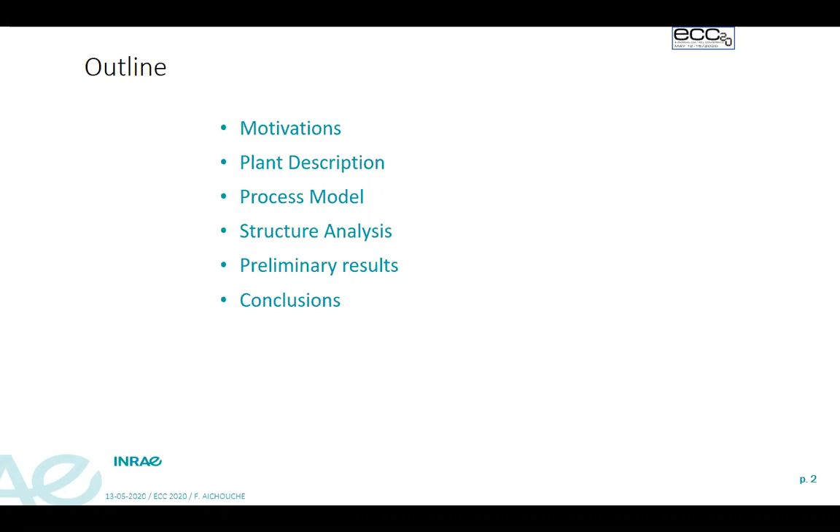So in the outline of my talk, I'm going to start by talking about the motivation that led us to state the flexibility of wastewater treatment systems and define our goals. Then I'm going to move on to the plant description, where we will describe a flexible platform and illustrate the various compartments used. After that, we define the process model used and how we analyzed the structure by manipulating the different sub-configurations, and we will finish with the results and their discussion, and finally the conclusion.

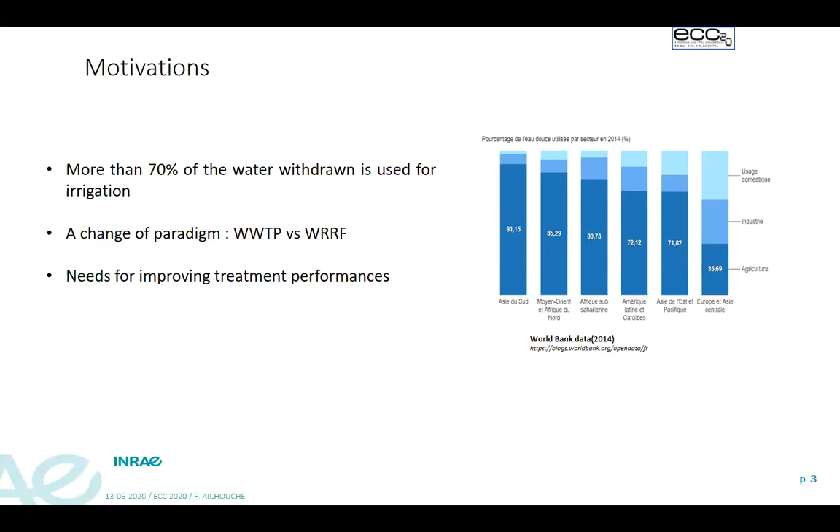We start with the motivation. In most regions of the world, more than 70% of the water withdrawn is used for irrigation. And according to the change of paradigm from wastewater treatment plants to water resource recovery facilities, traditional wastewater treatment plants are increasingly regarded as water resource recovery facilities, reflecting the value of water, nutrients, and other resources, in addition to ensuring the required effluent quality. But resource recovery units will need improved performance to be operated in a relatively stable condition and not with the same dynamics as in wastewater treatment plants.

The objective is to do things differently. Instead of just doing the traditional wastewater treatment and eliminating pollution to respect imposed standards, why not think of a more flexible system that allows traditional treatment during one period and resource recovery in another period? The idea is to close the loop between the flexible wastewater treatment plant and the plant needs, which are provided by the sensor or observer of the plant.

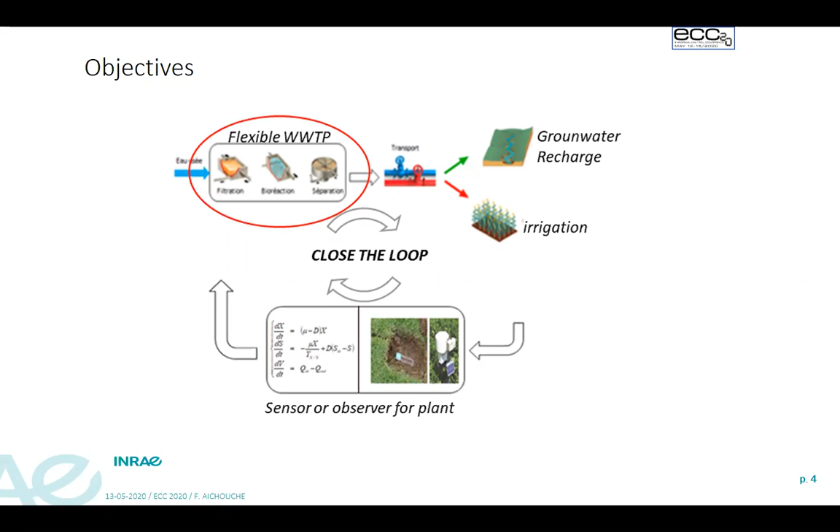The approach is to reuse treated wastewater for irrigation during periods of water stress. In other words, conserve some nutrients in treated wastewater for plant needs, or do full treatment outside the irrigation period. This operation requires a transition between two operation modes, reuse mode and full mode.

Now we present the platform proposed. So the flexible platform configuration consists of one anoxic tank, number 4 in the figure, followed by aerobic tank number 5 in the figure, and an aerobic tank with membrane, number 6 in the figure. The membrane is supposed to be ideal, with perfect separation of soluble and particulate matter. In other words, the fouling phenomena is not taken into account.

The platform can be operated by step feed as one stage, only tank number 6, or two stages with tanks 5 and 6, or three stages with tanks 4, 5, and 6, by adjusting the influent feeding location, Q in, and the recirculation rate. The denitrification takes place in anoxic tank number 4, while the nitrification and carbon oxidation are accomplished in both aerobic tanks number 5 and 6, and also three valves, A, B, and C, are assumed to have two positions. One external recirculation Qext depends on the position of valve C.

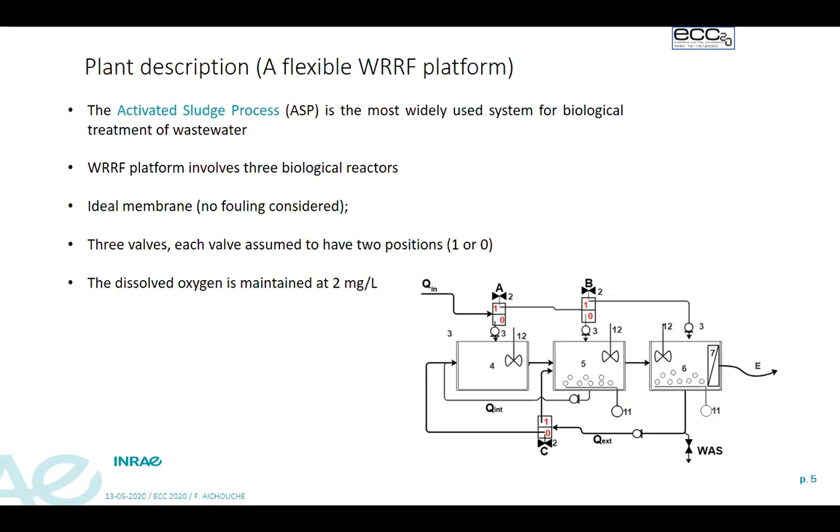We can redirect it to aerobic tank number 5 when the C position equals 1, or to anoxic tank number 4 when the valve C position equals 0. And another internal recirculation from aerobic tank number 5 to anoxic tank number 4. Also, the dissolved oxygen in both aerobic tanks is maintained at 2 milligrams per liter.

Now we present the process model. So the biological reactions inside each reactor in the platform are modeled using the ASM1-2ND model. It is a modified model of ASM1. The main modification consists in the addition of two-step processes for nitrification and denitrification. While the ASM1 model, figure on the left, considers only complete nitrification of ammonia NH4 to nitrate NO3 by autotrophic bacteria XBA, followed by complete denitrification of nitrates to nitrogen gas N2 by heterotrophic bacteria XBH.

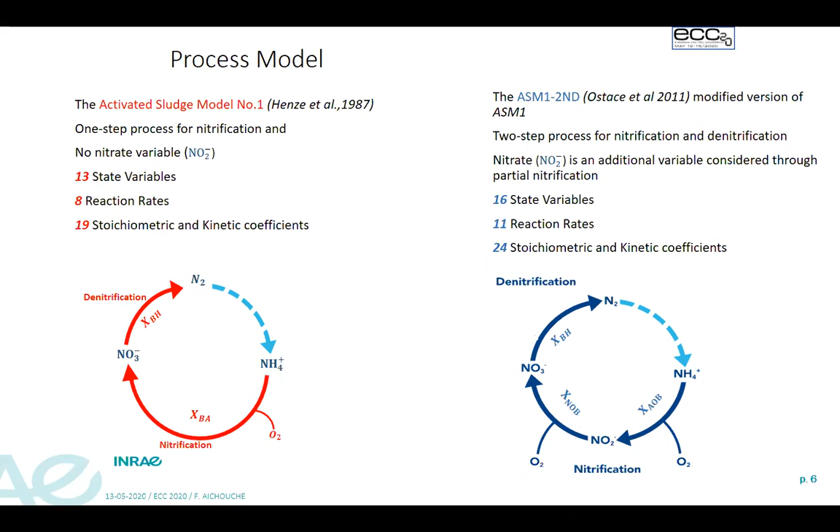ASM1-2ND uses two steps for nitrification. The first one describes the ammonium NH4 oxidation to nitrite NO2 by ammonium oxidizing bacteria XAOB, while the second step is the nitrite NO2 oxidation to nitrate NO3 by nitrite oxidizing bacteria XNOB. The denitrification is performed following a parallel two-step in which nitrate or nitrite are transformed into nitrogen gas N2 by heterotrophic bacteria XBH. This model was chosen because we can quantify all forms of nitrogen.

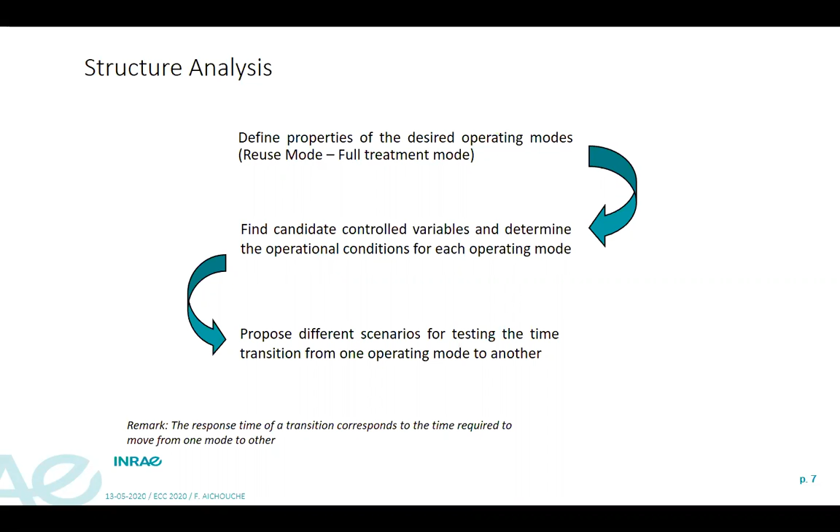So for structure analysis, in order to analyze the WRRF platform, we start by defining the properties of each desired operating mode, reuse and full mode, and the next step consists in determining the operating conditions and finding candidate controlled variables. After that, we propose various scenarios for testing and determining the best transition strategy in terms of response time. To remember, what we mean by response time of transition is the time required to move from one mode to another. So now we define the operating mode properties.

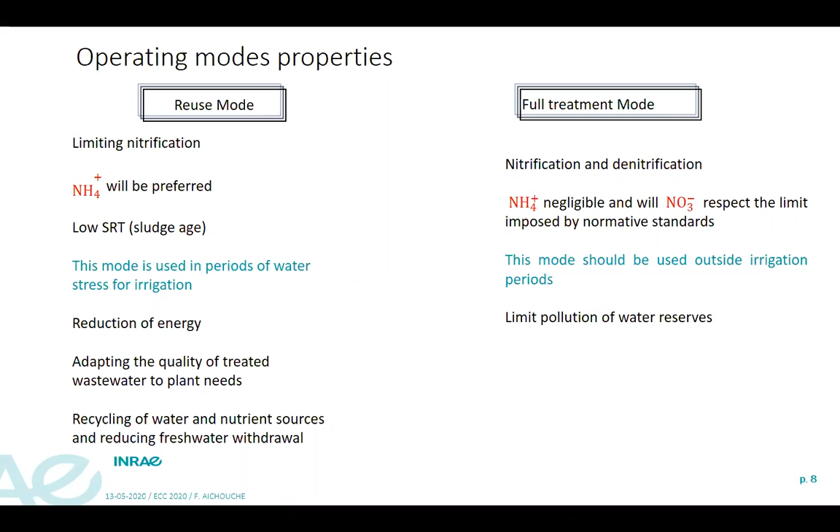In the reuse mode, it's necessary to find a condition in which the biological treatment will make it possible to preserve the nitrogen, and therefore NH4. So the nitrification will have to be limiting. It means that the sludge age SRT must not be too high. This mode will be used in periods of stress for recycling of water and nutrients such as NH4 and reducing freshwater withdrawal. The second, full mode, must make nitrification and denitrification possible. So the sludge age SRT must be sufficient. This mode should be used outside the irrigation period to limit pollution of water reserves.

Now we define the operational conditions. The sludge retention time is one important parameter for design and control in activated sludge processes.

It represents the average length of time that bacteria stay in a reactor before being wasted. The selected SRT directly affects the processes in an activated sludge system. This parameter contains a critical value called SRTM, or the minimum SRT, in literature defined as the inverse of growth rate minus mortality of nitrifying biomass. So by choosing an SRT higher than this value, the system can operate without loss of nitrifying biomass.

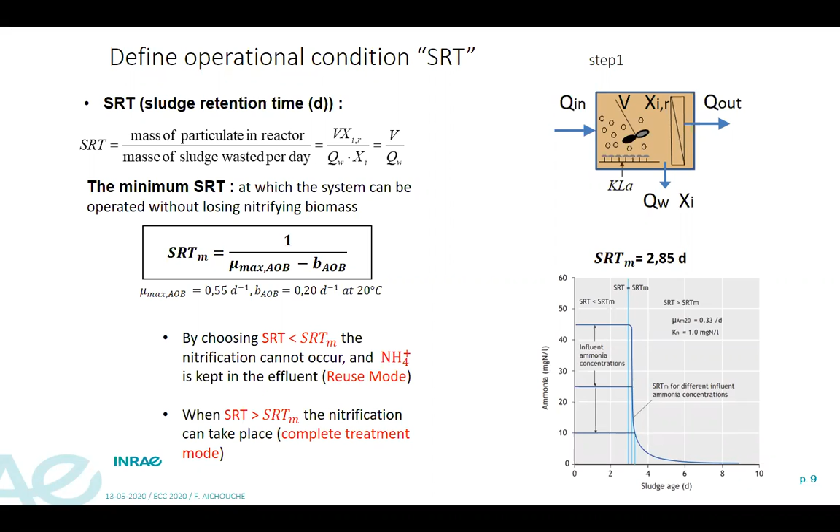As you can see in the figure on the bottom, for limiting nitrification, it is necessary to choose an SRT lower than SRTM. If you choose an SRT higher than SRTM, the nitrification can take place.

Now, valve position analysis. In order to analyze the platform and determine the best transition strategy in terms of quality and response time, it's necessary to identify the scenario for each mode of operation. Each scenario represents a combination of valve positions. We study switches of environmental condition, position of valves, and value of control signal. Different switches are simulated from one scenario to another, and corresponding response times are observed. It means the time required for the system to switch from one steady state to another one.

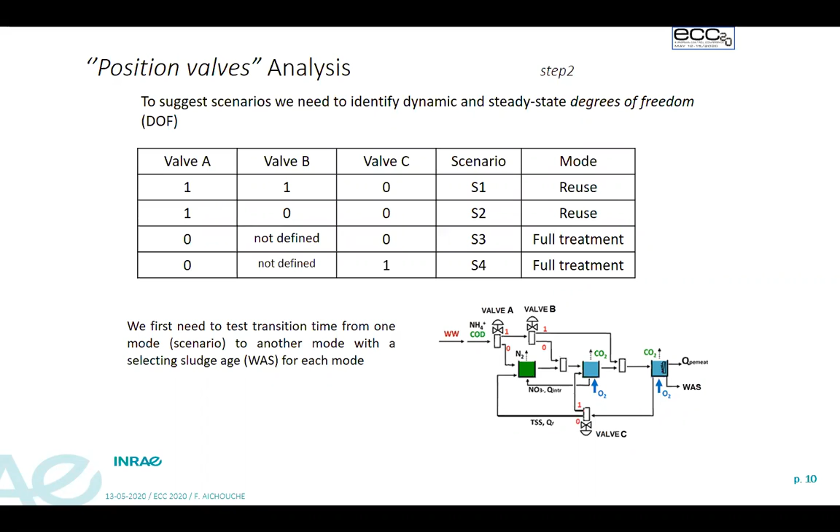In each mode or scenario, we selected the value of sludge age, or WAS, and the value of recirculation rate. It should be noted that the valves in different configurations are supposed to be all or nothing. Each valve represents a direction of corresponding flux. The first two scenarios are used for reuse mode, while the second two scenarios represent the full treatment mode.

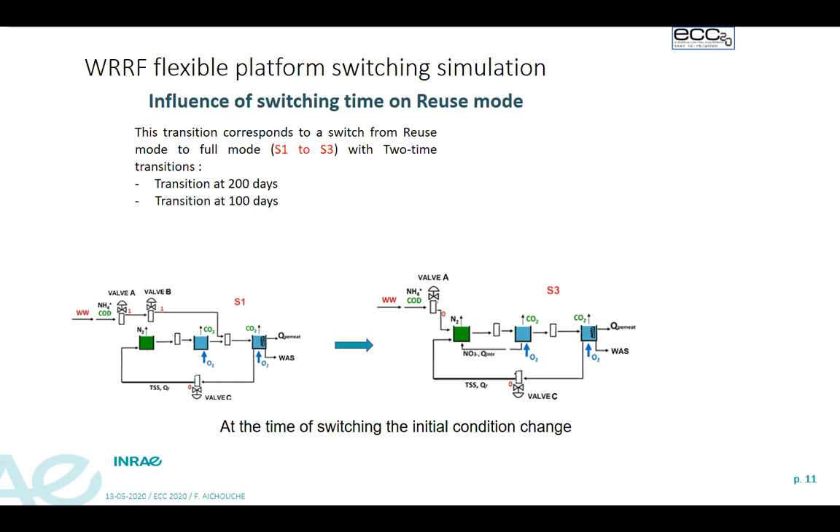Now, to study the influence of the switch time on the response time, we tested the transition from scenario S1 reuse, as we can see in the figure at the left, to the configuration corresponding to scenario S3, or full mode, figure on the right. Two transition moments, the first at 200 days and the second at 100 days. It's important to remember we have different initial conditions at the time of switch.

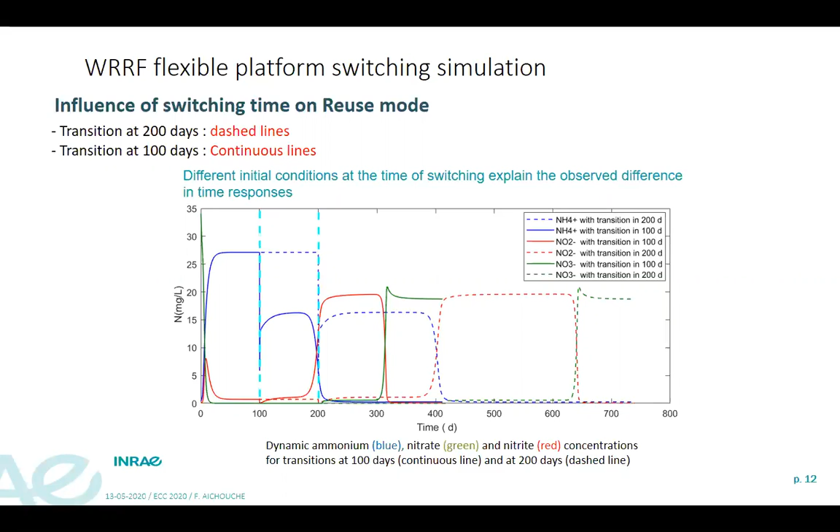In other words, the more the bacteria are subjected to a higher waste sludge flow for a prolonged time, the more their concentration is diminished. Now we want to see the influence of returned sludge direction.

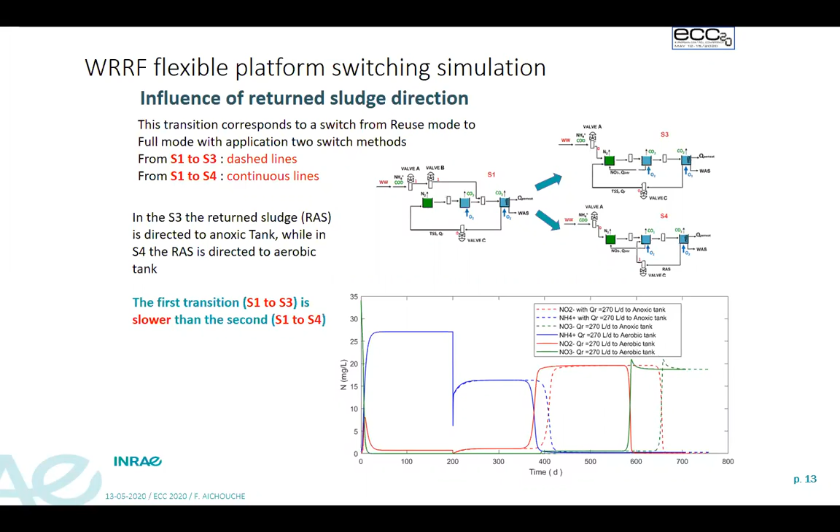The figure on the bottom shows the comparison between two transition cases. The first one is the switch from scenario S1 to S3, while the second is the transition from scenario S1 to S4. The main difference is in the direction of external recirculation. The first, dashed line, is slower than the second one. So when the returned sludge was directed to the aerobic tank at the instant of transition, it promoted the growth of nitrifying bacteria since it reduced the lag phase.

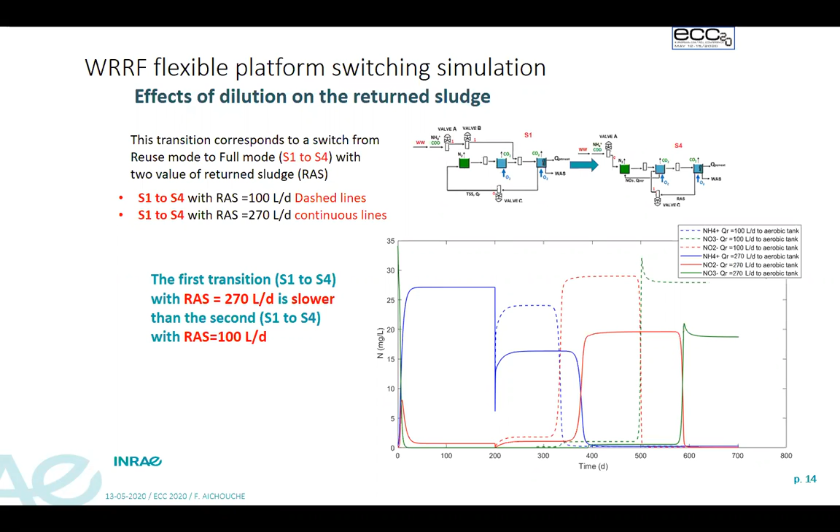So all the transitions that have been tested before have a very important response time, even if one is better than another. So the next strategy focuses on the use of bioaugmentation, or addition of nitrifying bacteria, to minimize the time to switch from S1 to S4. From the simulation viewpoint, it's equivalent to changing the initial condition of nitrifying bacteria, AOB and NOB, in the reactor at the moment of transition.

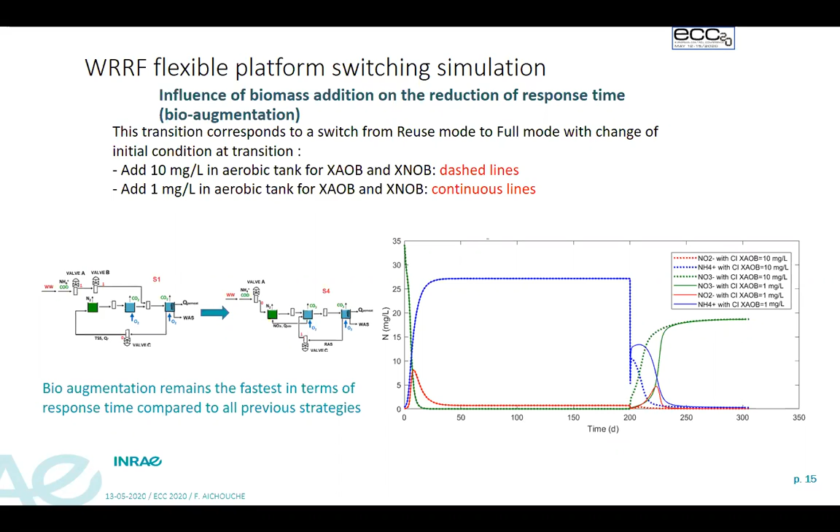In the figure, both profiles are represented: the addition of 10 milligrams per liter in dashed line and the addition of 1 milligram per liter in continuous line. Both strategies have less response time than all previous strategies, but the addition of 10 milligrams per liter, meaning more nitrifying bacteria, is a little faster than the addition of 1 milligram per liter. Also, when we added 1 milligram per liter, partial nitrification was observed because of the insufficient concentration added.

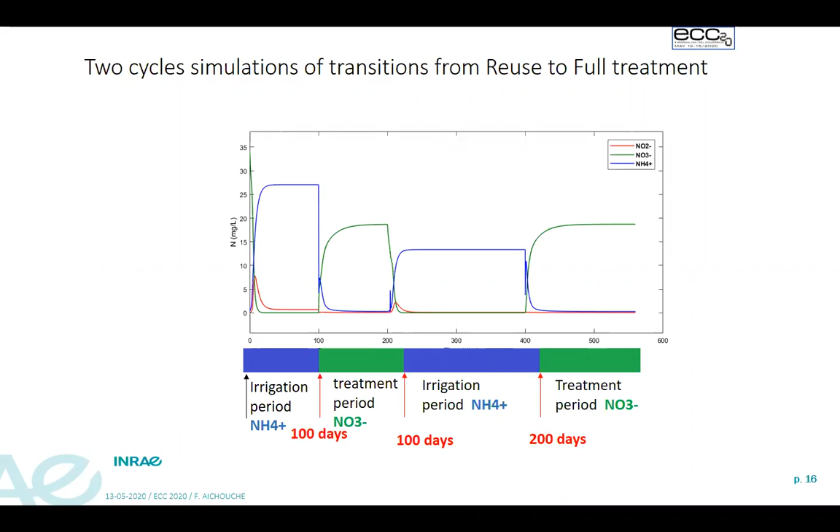Now, two transition cycles from reuse to full mode are simulated. The first cycle was performed after 100 days of operation in reuse mode to full mode, then switched back to reuse mode and stayed 200 days before switching again to full treatment mode.

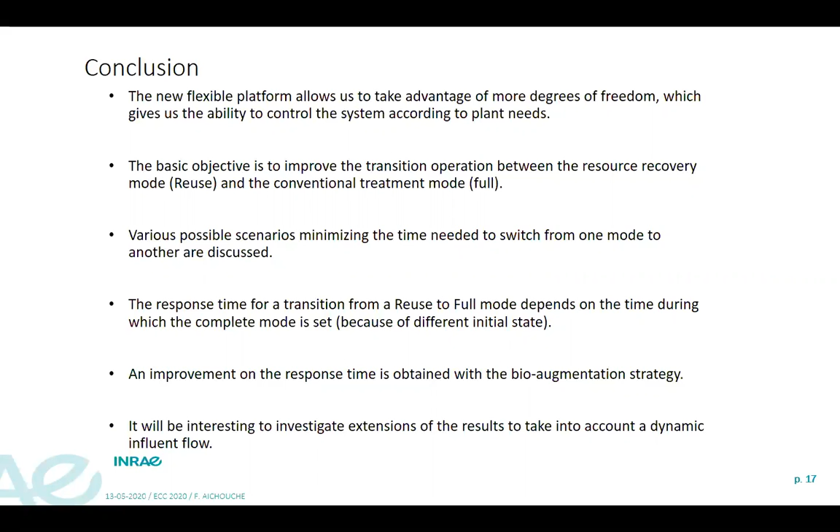In conclusion, the new platform allows users to take advantage of more degrees of freedom than the classic configuration. The basic objective is to improve the transition operation between the resource recovery mode and the conventional treatment mode. Various possible scenarios minimize the time needed to switch from one mode to another, and the response time for a transition from reuse to full mode depends on the time during which the complete mode is set, because of different initial states. An improvement in response time is obtained when the bioaugmentation strategy is applied. And finally, it will be interesting to investigate extending the results to take into account dynamic influent flow.